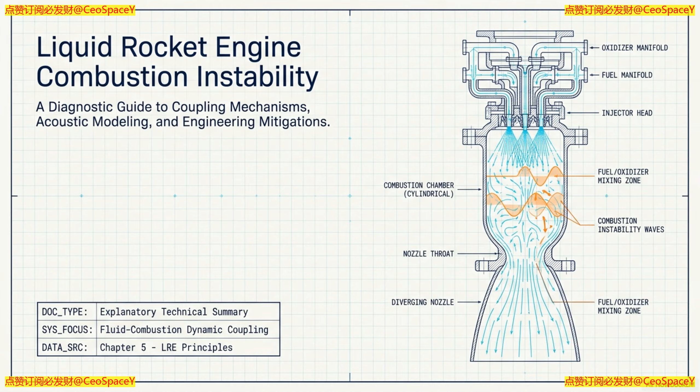To understand why an engine would just suddenly decide to rip itself apart, we have to look at the baseline environment inside a firing combustion chamber. Like, we need to separate normal noise from a destructive feedback loop. Well, and you have to realize the baseline environment of any rocket engine is incredibly chaotic to begin with. It's not a smooth burn. No, not at all. Normal combustion is never completely smooth. You've got liquid propellants atomizing, mixing, burning at literally thousands of degrees. Right. And that inherently creates turbulence.

It creates pressure fluctuations. So the way I picture it, it's like being in a crowded, echoing room. Okay. Like, you have 100 people. They're all having separate animated conversations. They're shifting their weight, moving around. It's loud, it's chaotic, but it's just harmless background chatter. Right. The floor isn't going to collapse under the weight of people moving randomly. Right, because the energy is scattered.

But combustion instability would be like if that entire crowd suddenly synchronized their movements and they just started stomping their feet in perfect rhythmic unison. Yes, that's a great analogy. And suddenly the floor shatters. Because when a crowd shifts around randomly, the total effect of those random fluctuations over time basically cancels itself out. The room stays intact. Exactly. But in combustion instability, the energy stops being random. It becomes highly periodic. It concentrates at specific inherent frequencies of the combustion chamber itself.

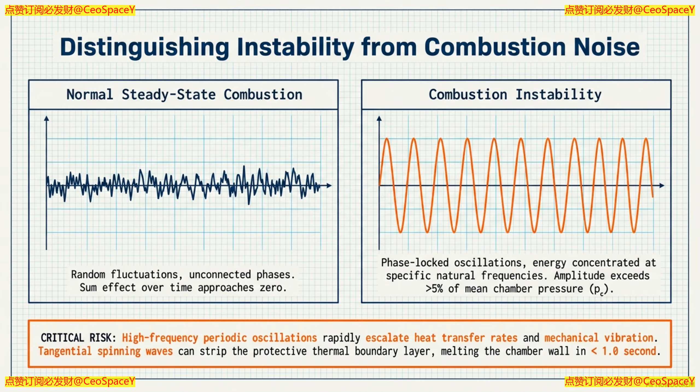So the energy from the combustion process starts feeding directly into the acoustic waves of the chamber. Right. It starts feeding the stomping. And when that happens, the pressure amplitude swings can exceed 5% of the average chamber pressure. And sometimes they spike up to tens of percent. Wait, tens of percent? Yeah. And if you consider that the baseline pressure in a modern rocket engine can be hundreds of atmospheres, a rhythmic 20% swing is catastrophic. You just tear the metal apart.

Exactly. It causes massive mechanical vibration that can snap pipes, and it severely spikes the heat transfer to the engine walls. It can physically destroy or literally melt engine components in the blink of an eye. So for anyone listening, distinguishing between harmless random system noise and a system-destroying feedback loop, that is a universal engineering challenge. It's absolutely universal. So we know what the beast looks like. Now we need to understand how it actually behaves.

The physics of this chaos are categorized by frequency: low, medium, and high. And it all depends on which parts of the rocket are essentially talking to each other in that destructive loop. So let's start with the low end. This is anything below 200 hertz. Right. So low-frequency combustion instability is fundamentally a coupling between the combustion process in the chamber and the flow process in the propellant supply system. So like the pipes, the valves, the pumps leading into the engine. Exactly. And because the frequency is so low, the wavelength of the oscillation is much larger than the physical dimensions of the combustion chamber itself.

So the chamber itself isn't echoing. The whole volume of gas inside it is acting as a single unit. Yes. It acts like a Helmholtz resonator. The entire mass of gas inside the chamber oscillates together, essentially moving like a single solid block of pressure. Oh, wow. Yeah, it's what we call a bulk mode. Like a giant invisible piston slamming back and forth inside the engine.

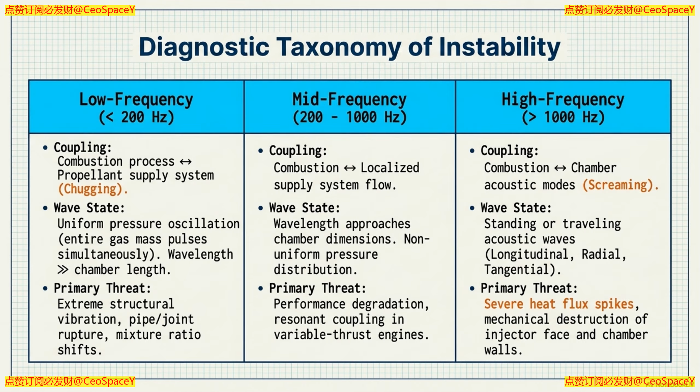That's exactly it. And that massive slamming feeds back up into the supply lines. It physically alters the flow rate and the mixing ratio of the propellants as they enter the chamber. Which then creates another pressure pulse, keeping the whole cycle going. Right. It can break propellant pipes, snap mechanical joints, and cause the engine's thrust to just severely fluctuate.

Unbelievable. Okay, then we move up the spectrum to medium frequency, which sits between, what, 200 and 1,000 hertz? Yeah, 200 to 1,000. And this one is kind of the weird middle child. It mixes the feed system fluctuations with the actual chamber acoustics. And the text notes this is especially common in variable thrust engines, which, if I think about how throttling works, you are continuously changing the flow rates and chamber pressures. That must change the acoustic properties of the chamber as well, right?

It changes everything. As you throttle a variable thrust engine up or down, you are actively changing the density and the temperature of the gas inside the chamber. Right. And that directly alters the speed of sound within the gas, which in turn shifts the resonant frequencies of the chamber. So somewhere in that continuous adjustment of throttling, you are highly likely to hit a sweet spot. Exactly. A spot where the shifting acoustics of the chamber perfectly align with the fluctuation in the supply system. You essentially tune the engine into its own destruction radio station. That's a fun way to put it, yeah.

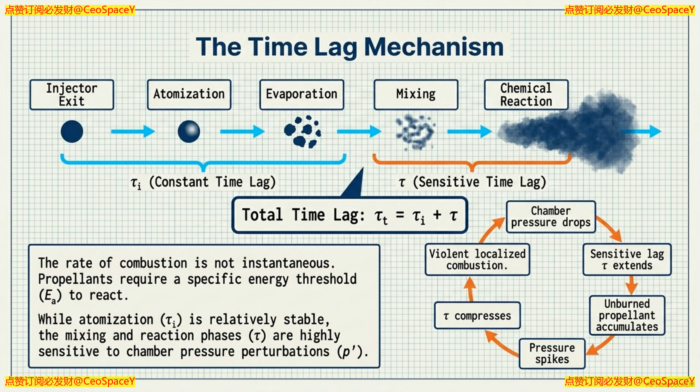But the absolute worst of the bunch, the one that keeps aerospace engineers up at night, is high frequency. Oh, yeah. Anything over 1,000 hertz. Because this is where the combustion couples directly with the acoustic resonance of the chamber itself. Right. And what's fascinating here is how these high-frequency waves physically manifest. Because the geometry of a cylindrical rocket chamber supports different modes of acoustic waves.

Okay. You have longitudinal waves, which basically bounce end-to-end from the injector face down to the nozzle. And then you have transverse waves, which travel perpendicular to the main flow of thrust. Okay, so side to side. Basically. Right. And these transverse waves come in two main types. You've got radial waves, bouncing from the center axis out to the walls, and then you have tangential waves.

Okay, let's focus on that tangential wave, because this is where the physical reality gets truly terrifying. It does. A tangential wave isn't bouncing end to end or center to wall. It's traveling around the circumference of the chamber. Yeah. It's essentially an acoustic tornado spinning along the inner walls. And the result is that it can destroy the protective boundary layer of gas near the walls and melt the engine's chamber wall in under 1 second.

Wait, really? Is it the physical spinning motion of the wave that's scrubbing that layer away? Yes. It acts almost like a supersonic squeegee. A supersonic squeegee. Yeah. Because rocket engines burn incredibly hot, right? Often far hotter than the melting point of the metal alloys they're constructed from. Right. Which always sounds impossible. The engine only survives normal operation because engineers carefully design a thin, cooler boundary layer of gas that hugs the inside walls. It acts as an insulating shield.

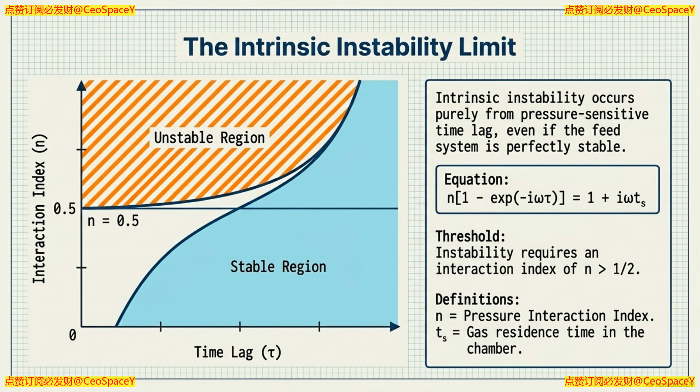Okay. But when a tangential transverse wave starts spinning, the sheer velocity of that pressure wave physically strips away that protective boundary layer. It just wipes the shield right off the metal. Exactly. And without that insulation, the raw, thousands of degrees heat of the core combustion violently transfers directly to the metal chamber wall and the injector face. And because the wave is spinning so fast, the convective heat transfer rate just spikes exponentially.

Wow. That is how you go from a functioning, structurally sound engine to a literally melted puddle of slag in less than a second. Less than 1 second. Which begs the obvious engineering question.

Since a high-frequency tangential wave can melt your engine before you even have time to blink, how do you build a rocket that survives it? Well, you have to build physical hardware solutions to tame it. Right. And the source document mentions 3 primary countermeasures to disrupt these acoustic modes. You've got injector face baffles, acoustic dampers, and injector modifications.

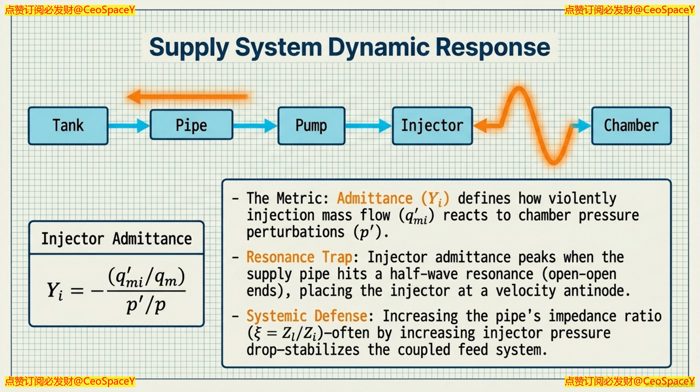That physical blockage is a big part of it, yeah. But the more important mechanism is actually acoustic. Oh. By putting up those physical walls, you fundamentally change the acoustic geometry of the chamber head. You divide a large cavity into several smaller cavities. And that matters because? Because it significantly raises the natural frequency of those transverse waves. A higher frequency requires vastly more energy to excite and sustain. Plus, the edges of the baffles create vortices and friction that dissipate whatever acoustic energy does manage to build up.

That's so clever. But, I mean, you can't just fill the entire engine head with massive metal dividers, right? The engine would be incredibly heavy, and all those complex welded corners would be super prone to thermal cracking under the extreme heat. Exactly. Which is why baffles are usually limited to suppressing the lower mode transverse waves. For the really high frequency stuff, you turn to acoustic dampers.

Ah, specifically the quarter wave cavities. Yes. I love these. These are tiny tuned acoustic resonators. You essentially drill a series of small specific cavities into the walls near the antinodes of the waves, right? Yep. The spots where the wave's pressure amplitude is at its peak. Right. They function on the principle of a Helmholtz resonator or a tuned pipe. You engineer the depth of the cavity to be exactly 1/4 of the wavelength of the acoustic frequency you want to kill.

Okay. When the high-pressure part of the wave hits the cavity, the pressure travels down to the bottom, bounces off the back wall, and travels back up. And because of that quarter wave depth, by the time the bounce wave reaches the opening again, it is exactly out of phase with the incoming wave in the chamber. Exactly. It uses the wave's own energy to cancel itself out. That is absolutely brilliant. It really is.

So for a large engine, you use a combination approach. Right. You put a few sturdy baffles on the injector face to kill the big low-mode transverse waves, and you line the walls with hundreds of these tiny quarter-wave cavities to eat up the high-frequency waves. It's this elegant, multi-layered compromise between structural integrity and acoustic damping.

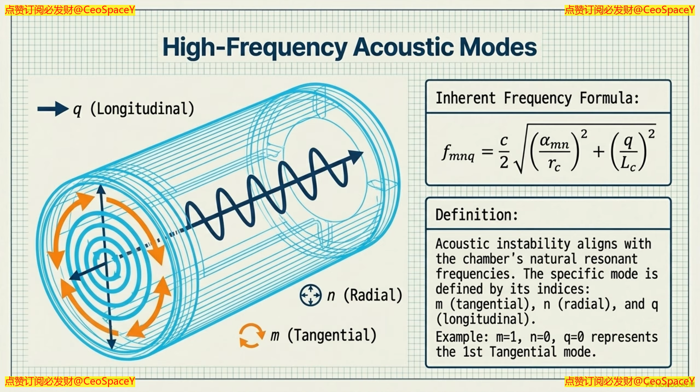Yeah. And then the third method is tweaking the injector itself. You change the hole sizes, the angles, or the fuel distribution patterns to intentionally misalign the combustion energy release from the areas where the acoustic resonance is strongest. So you move the fire away from the acoustic antinodes. You don't feed the monster where it's hungriest.

I love that. Okay, so you've built your engine, you've installed your baffles, tuned your quarter wave cavities, tweaked your injectors. How do you know it actually works? Well, you have to test it. Because you absolutely cannot just bolt it to a launch vehicle and hope for the best in space. Definitely not. You test it extensively, and one approach they used to use a lot is the hot fire statistical method. Okay. You just put the engine on a test stand and fire it over and over again, observing if it spontaneously develops instability during normal operation.

But, I mean, if I fire an engine 100 times and it doesn't blow up, that just tells me it didn't blow up yet. It doesn't actually tell me what my margin of safety is. I could be miles away from the cliff edge, or I could be balancing on a tightrope with zero room for error. And that is the fundamental flaw of relying purely on statistical hot fires.

The text explicitly points this out. It tells you nothing about the engine's anti-interference ability. Okay. To find that true margin of safety, aerospace engineers use the pulse excitation method. Okay, here's where it gets really interesting.

To test a liquid rocket engine, engineers literally fire pulse guns, explosive charges, or high-pressure gas pulsers directly into the firing combustion chamber. Yep. They deliberately shoot small bombs into the wave antinodes of an engine running at full throttle. It seems totally counterintuitive, right? Yeah. To detonate explosives inside a machine you are actively trying to keep stable. It sounds insane. But it is the absolute gold standard for testing.

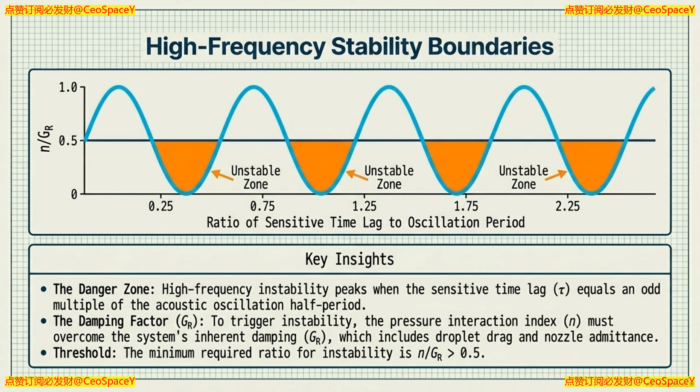Now I want to zoom way in, down to the microscopic mathematical level to understand the actual root cause of this whole phenomenon. Because all these physical fixes are just treating the symptoms. To understand the disease, we have to look at time lag theory. Right. At a fundamental physical level, combustion instability is a problem of time. Specifically, the combustion time lag, represented by the Greek letter tau.

Tau. Okay. This is the finite time interval between the exact moment a drop of liquid propellant is injected into the chamber and the moment it completely reacts to become final combustion gas products. Because even in a raging inferno, physics takes time. Exactly. And the time lag is divided into two distinct parts. First is the invariable lag. Which is what... This is the physical time required for the liquid streams to break apart into droplets, atomize, evaporate, and mix. It's largely a mechanical process and doesn't change much based on fluctuations in chamber pressure.

Okay, got it. Second is the sensitive lag. This is the time required for the actual chemical reactions to occur. And this portion is highly sensitive to the pressure and temperature inside the chamber. Wait, if the chemical reaction time changes based on pressure, how does that actually create a destructive vibration? It has to sync up with the acoustic waves we were talking about earlier, right?

Yes, and this is governed by something called Rayleigh's criterion. Lord Rayleigh discovered that if you add heat to an oscillating mass of gas at the exact moment its pressure is highest, you amplify the oscillation. Okay. If you add heat when the pressure is lowest, you damp the oscillation. So it's like pushing someone on a swing. Exactly like that. If you push them exactly as they reach the highest point of their arc, they go higher. If you push them at the wrong time, you kill their momentum. That is exactly the mechanism.

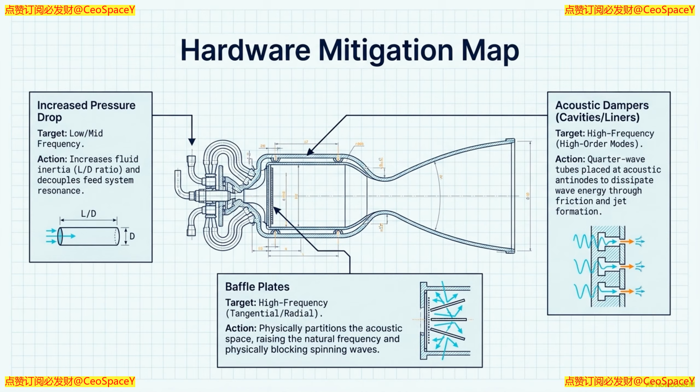Now imagine a random pressure wave passing through the chamber. The pressure goes up slightly. Because the pressure is higher, the sensitive time lag decreases. The chemical reactions suddenly happen faster. Right. But there is a delay. That total time lag, tau, before that freshly injected fuel actually burns and releases its energy.

And if that time lag tau happens to perfectly match the time it takes for the acoustic pressure wave to bounce back and hit its peak again, then that massive burst of chemical energy is released at the exact highest pressure point of the acoustic cycle. Rayleigh's criterion is fulfilled.

What? The wave is amplified. This draws in more propellant, which burns faster, releasing an even larger burst of energy at the next peak. The cycle just rapidly spirals out of control.

Okay, let me challenge this with a hypothetical. Sure. Let's say I'm the greatest aerospace engineer in history. I build a perfect feed system. The pipes are infinitely rigid. The turbopumps have zero fluctuation. The flow is mathematically flawless. Okay. The liquid enters the chamber perfectly smooth. Can the engine still become unstable?

Yes. Really? Yes, and this is a chilling reality for propulsion engineers, known as intrinsic instability. Even with hardware that is 100% mechanically perfect, the physics of the combustion itself can cause destructive oscillations. How is that possible? It all hinges on a mathematical variable called the pressure interaction index, denoted by the letter N. What does it represent? It measures how intensely the chemical reaction rate reacts to a change in pressure. It is a sensitivity dial.

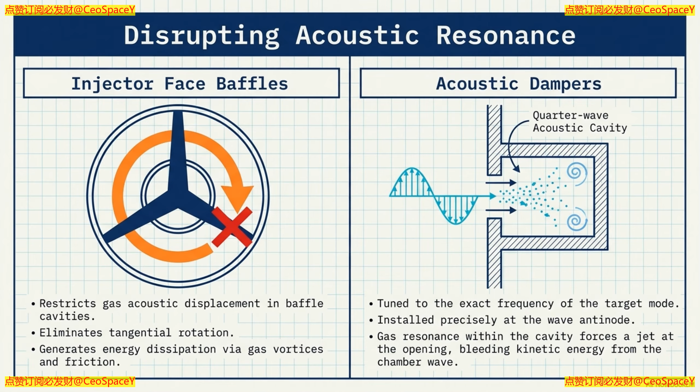The mathematical models dictate that if N is greater than 0.5, the increase in the rate of energy release will mathematically outpace the natural acoustic damping of the chamber. So if N is greater than 0.5, the sheer pressure sensitivity of the sensitive time lag will cause the system to spontaneously shake itself apart. Yes. No matter how perfectly the hardware was machined. Exactly. The sensitivity outpaces the damping, creating a runaway positive feedback loop from within the chemical reaction itself.

The math guarantees instability. That is a staggering realization and really applies to any system you interact with, like markets, traffic, workflows. Delays between an input and an output, combined with high sensitivity to pressure, will inherently create chaotic oscillations. It's a universal principle of dynamic systems, yeah.

So what does this all mean? We've covered an immense amount of ground today. We started by exploring the terrifying reality of a tangential transverse wave that can spin around a chamber and melt an injector head in under 1 second. Yeah. By stripping away its boundary layer. We looked at how engineers fight back by installing structural baffles and tuning quarter-wave acoustic cavities to cancel out specific frequencies. Right. We learned that to test these massive machines, engineers deliberately shoot explosives into the antinodes, demanding that the system damp the shock wave in 40 milliseconds.

40 milliseconds. And finally, we zoomed into the math of time lag theory and Rayleigh's criterion, realizing that if the pressure interaction index crosses that 0.5 threshold, the chemistry itself guarantees destruction. Mastering those variables is basically the great triumph of modern propulsion engineering. But there is one final detail regarding how we model these systems today that I think provides a pretty sobering perspective on all the technology we build. Oh,

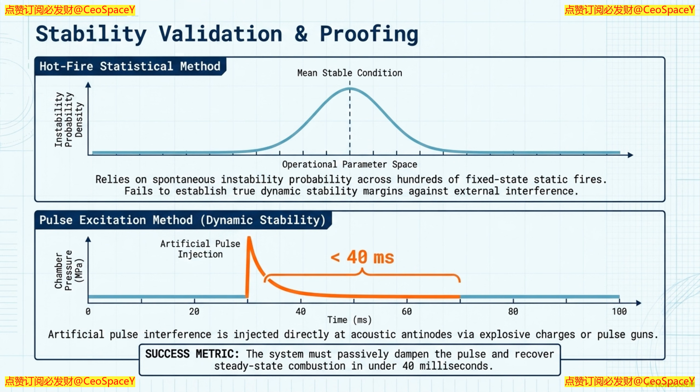Lay it on me. So, toward the end of the technical documentation, it discusses numerical integration methods. Okay. This is how modern computers model the chaotic fluid dynamics inside the chamber, calculating the state of the gas step by step, grid by grid. Older linear mathematical models assume that instability worked on a slope. Like a gradual thing. Right. If a system was inherently unstable, even a microscopic disturbance would gradually grow until it destroyed the engine.

But nonlinear numerical integration shows something different. It shows something vastly more complex. By accounting for the chaotic, nonlinear feedback loops of fluid dynamics, these modern models reveal that an engine can be perfectly dynamically stable against small, everyday bumps. The acoustics stamp out, the time lags don't align, it hums along beautifully.

But if a disturbance comes along that crosses a specific, finite threshold of energy, the nonlinear math shows the entire system doesn't just degrade smoothly. What? It instantly crashes into violent, unrecoverable instability. So it's not a slope, it's a structural cliff. A cliff that is entirely invisible until you fall off it.

So I'd leave you with this thought to mull over. The most advanced, meticulously engineered machines humanity has ever created are operating in a mathematically chaotic regime. Right. We can never theoretically prove they are absolutely stable under all conditions. We can only prove, through explosive testing and rigorous modeling, that their threshold for destruction is just slightly higher than the chaos we expect them to encounter.